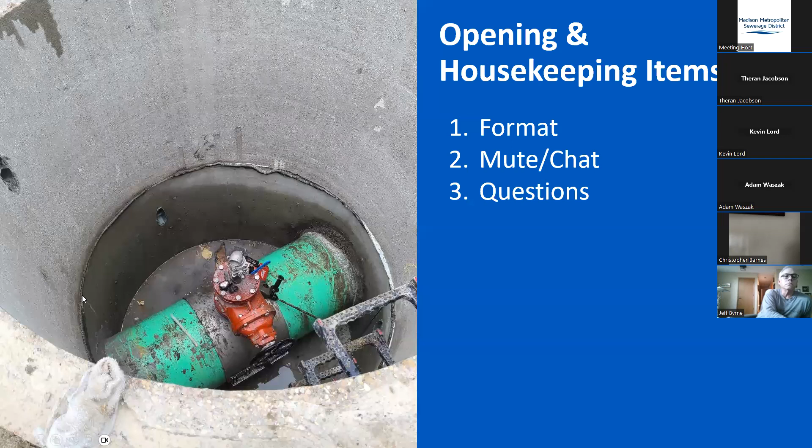The agenda for tonight's meeting: I will go over what the district is, the project background, construction corridor specifics, the selected improvements update that was vetted through PIM number 2 and number 3, and then the trail closures, the construction schedule, and then communication during construction. And then we will take any questions at the end.

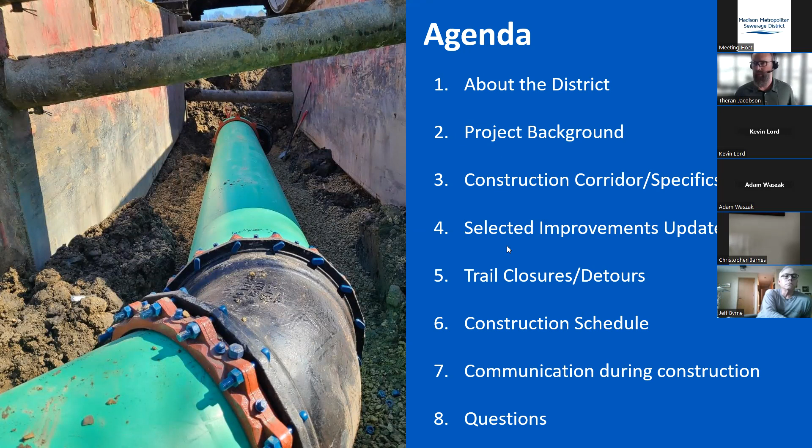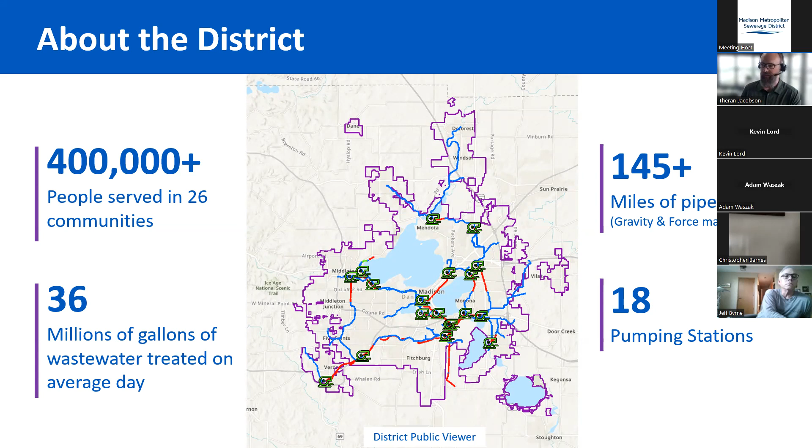The district comprises a regional conveyance system and treatment facility. So basically almost every community within the Dane County area that's adjacent to the city of Madison is connected to the district. So your local collection systems discharge wastewater to the district. We convey it through 145 miles of gravity and force main, and also through 18 pumping stations that end up at the Nine Springs treatment plant that is just west of Lake Waubesa. And currently we're treating about 36 million gallons of wastewater on an average day.

So what is the sewer system that is underground? From your house, whether you're using your sink, toilet, shower, etc., that flows through a lateral into the street by gravity, and a gravity main within the street flows to larger pipes. As you move more and more downstream, the pipes get larger and larger. And then at some point, it goes to a pumping station where it cannot flow by gravity anymore. The pumping station basically lifts it, pressurizes it, and pushes the water uphill from a low point to a higher point where it can go to gravity flow again.

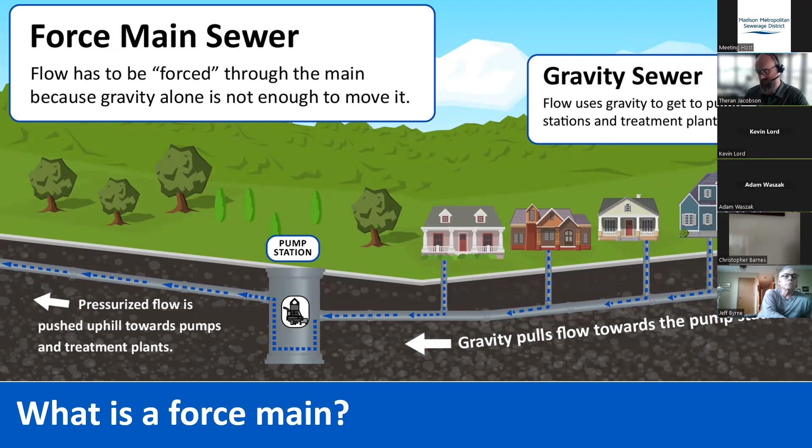If you think about a pumping station and a force main, it's similar to a sump pump in your basement. It pulls water out of a pit, it lifts it through force of the pump out the pipe that discharges to your yard. A similar situation, just untreated water versus clear water.

The Pumping Station 17 planned service area: one of the reasons for the upgrades with the need for the force main is to account for additional flow. That's for multiple reasons. Long-term growth of the area that's within gray on the screen here. You can see the Midtown station at the midpoint here is going to be decommissioned in the near future, and that is going to reroute flow to Pumping Station 17 also. Hence the need for additional capacity, ultimately the need for this additional relief force main pipe. So the city of Verona, portions of the town of Verona, portions of the city of Madison, and portions of the town of Middleton will all convey water to this collection system.

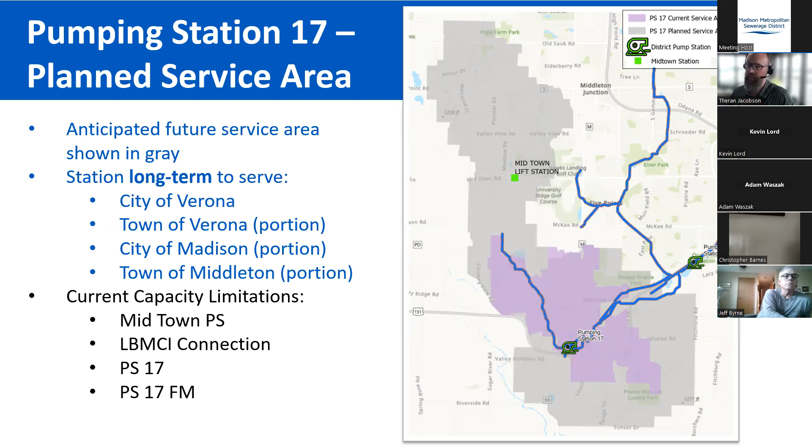The current limitations are the Midtown pumping station and the lower Badger Mill Creek interceptor connection that will go from the end of the blue line right here up to the Midtown station. Those are separate projects. The project we're focused on here is the Pumping Station 17 force main.

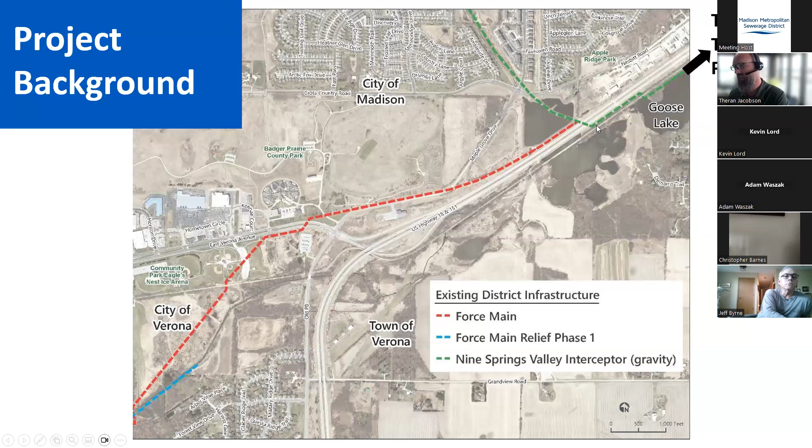The project background for the force main. Phase one was completed in conjunction with the city of Verona back in 2021. That started from the pumping station on Bruce Street and ended at the phase one limits just north of Arbor Vitae Place, south of the ice rink and the Little League complex in the city of Verona. Our objective for phase two is to take it from that point, cross old PB 18151, and connect up by Goose Lake, which is displayed in another figure right here.

The final route for the force main, which was presented at previous public information meetings, starts at Arborvitae and runs along the red route here. That's the force main portion of the pipeline. Then that transitions from force main to gravity at a high point, and gravity flows up to the Nine Springs Valley interceptor that is adjacent to Goose Lake, where we will tie in. That is on the north side of the Military Ridge State Trail.

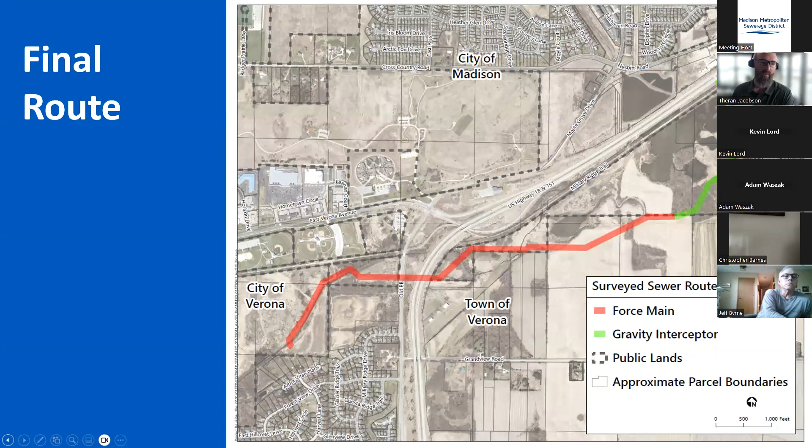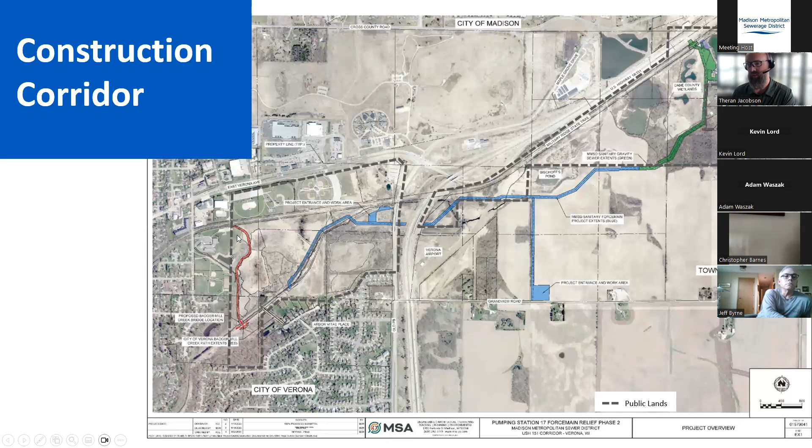The anticipated access points for construction will be through the County Gardens, off of Old PB, and then off of Grandview Road; those are the primary entrances for the district's work. The primary entrance for the city's work is through the ice rink off of East Verona Avenue, crossing the Military Ridge State Trail. There are secondary access points that each phase of the project will have to use, whether it's the city phase or the district phase, depending on what activities are occurring.

So the city's secondary access is off of Arborvitae, and the secondary access for the district's project will be off of Old PB to do some of the trenchless work, which I will get into the details of, along Old PB, and then also off of US Highway 18/151 with limited access. And then there is a secondary access through the town neighborhood up there for very limited access when we're doing work adjacent to that area. So primary access is at the County Gardens off of Grandview for the district, and for the city work it's off of East Verona Avenue.

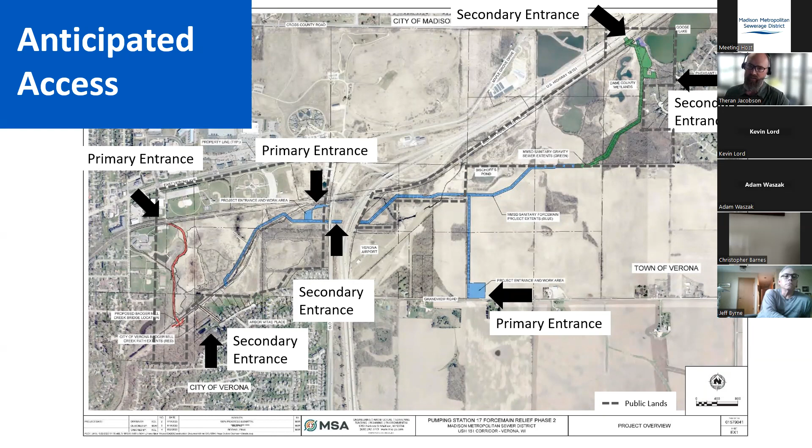The construction keynotes here, I want to highlight some areas along the district route. We have two creek crossings that are west of PB. We have trenchless installation under the roadways of Old PB and US Highway 18/151. That's basically a boring machine that will drill under the road to daylight the pipe from one side to the other, so that way we can keep traffic open and not install that by open trenching. We have additional creek crossings on the east side of 18/151.

There are select trees that are not being removed. There's an oak and some hickories that are being preserved along the south line of the Goose Lake area by the town and the county lands up there. And then we do have some tree clearing in this area up by the town where the gravity section of the district pipe is. And then, of course, the city path and the bridge construction to go from the south side of Badger Mill Creek to the north side.

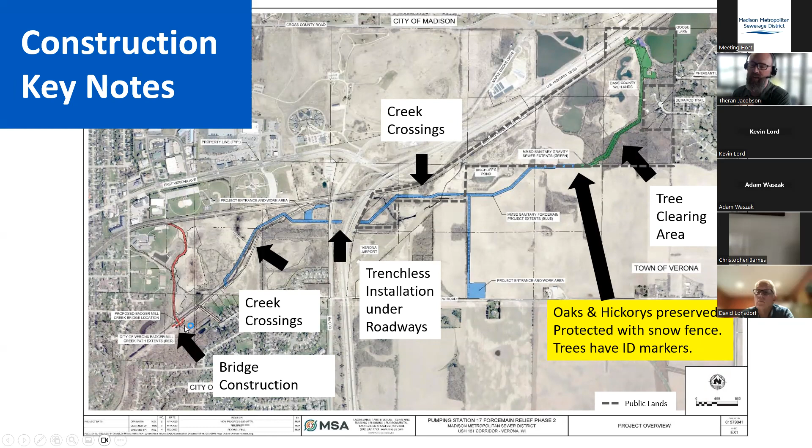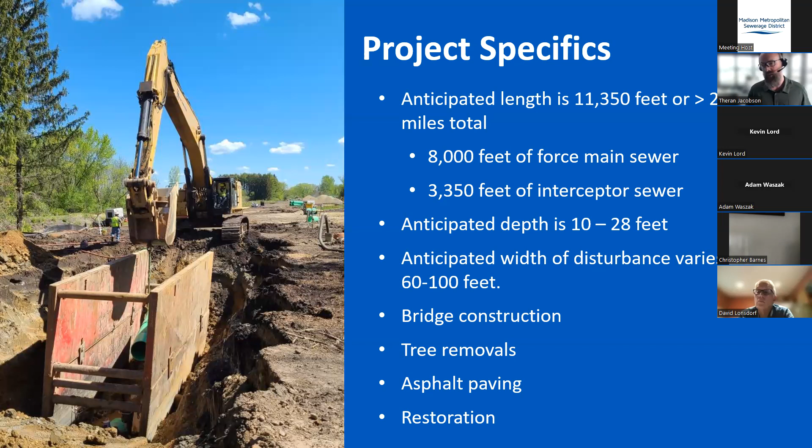For the project specifics, there is anticipated a little over 11,000 feet of pipeline to put in, so a little over 2 miles. 8,000 of that is force main pipe, and a little over 3,300 is the interceptor sewer. We have depths ranging from 10 feet to 28 feet for excavation. That'll translate to a width of anywhere from 60 to 100 feet along the corridor of disturbance. We also have the bridge construction over Badger Mill Creek for the city work, the tree removals, the asphalt paving associated with the city work, and overall vegetative restoration as part of the project.

The select improvements were discussed at the previous PIMs, and I do have a figure to follow to refresh everyone's memory. There are select improvements being done with the project and then after the project. Completed with the project are going to be the Badger Mill Creek path extension and paving of the Arborvitae connection. That's improvement number 1. These are the same numerical references that were previously presented. The oak tree line / hickory tree line restoration and select clearing. The native prairie restoration on areas 9 and 10. And then the Pheasant Lane trail widening.

And then after the project, Dane County is going to restore areas 3 and 6. And within that, the Friends of Badger Mill Creek, and I coordinated with Brian Christian earlier on this, are doing work in area 3 with Dane County. So I wanted to put a plug in for him. If anyone wants to reach out to him and help those efforts, he's more than willing to take some extra hands and feet.

And then after the project is completed by the Ice Age Trail, they're going to realign the Ice Age Trail. And like I said, map to follow. The Friends of the Badger Mill Creek, some of the work that they've completed and plans to complete, this is information I got from Brian Christian.

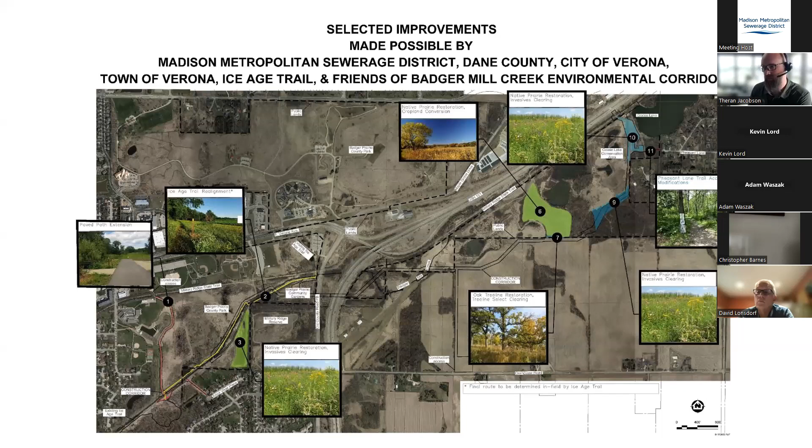The native prairie restoration goals in the areas of 3 and 6 and then 9 and 10 are basically to bring back the historical landscape of the wetland and savanna areas, preserve the fire dependent species of the hardwoods of the oak and the hickory, and then reestablish some of that habitat and that ecosystem value.

And then selected improvement 1. This is the Badger Mill Creek path extension. I just wanted to provide a zoom in of this. So the bridge will basically go just east of where the Lincoln Street channel discharges into the Badger Mill Creek, and then follow the east side of the creek around the new pond and then tie in up by the Little League, just south of the ice rink. And then also provide paving from where the current Ice Age Trail bridge is by the pines there, and then tie into Arbor Vitae Place.

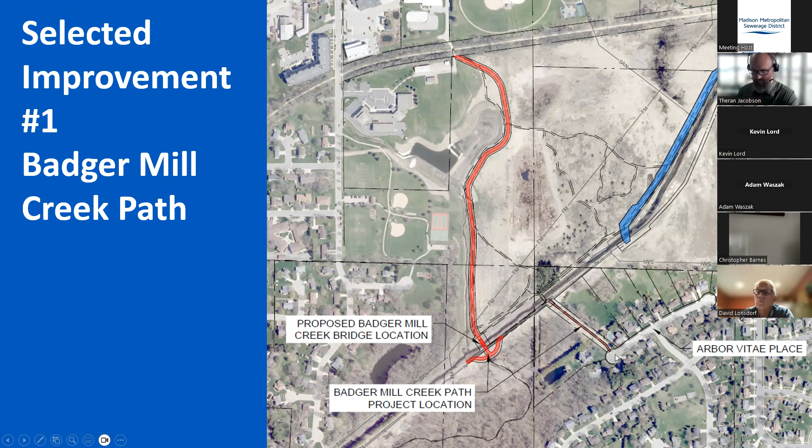And then the Ice Age Trail realignment. So after the project is done, this will be coordinated by the Ice Age Trail, to basically reroute from where the trail does the horseshoe through the county lands where the boardwalk is. It'll cross the new bridge that the city's installing, run along the north side of the creek and go along the berm that's already in existence, cross back to the south side of the creek and run along north of the gardens, and then tie back in to the bridge that is connecting the park and ride to the county gardens just west of Old PB there.

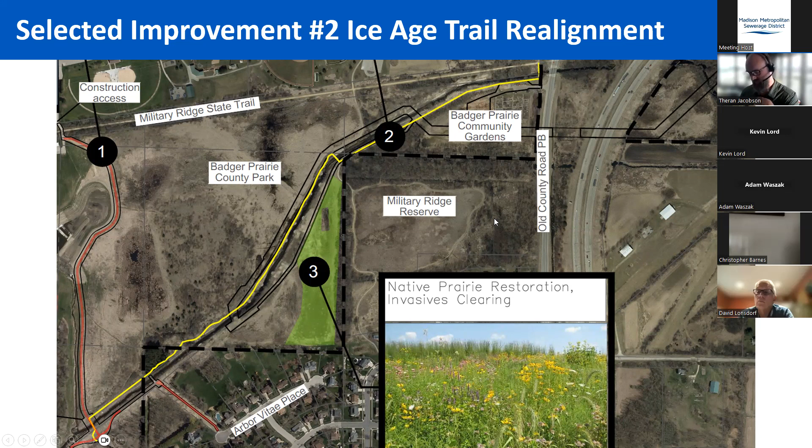And I'm going to hand it off to Kevin Lord now. He was our design consultant for the project. He's going to go over the anticipated trail detours and closures. So Kevin, I'm going to mute and you can take it away.

All right, let me know you can still hear me though, Theran, quick. We are good. I can hear you. Okay, perfect. All right, thanks, Theran.

As Theran mentioned, I'm Kevin Lord with MSA Professional Services, and we were working with the district and the city of Verona on the design part of the project. You can go to the next slide.

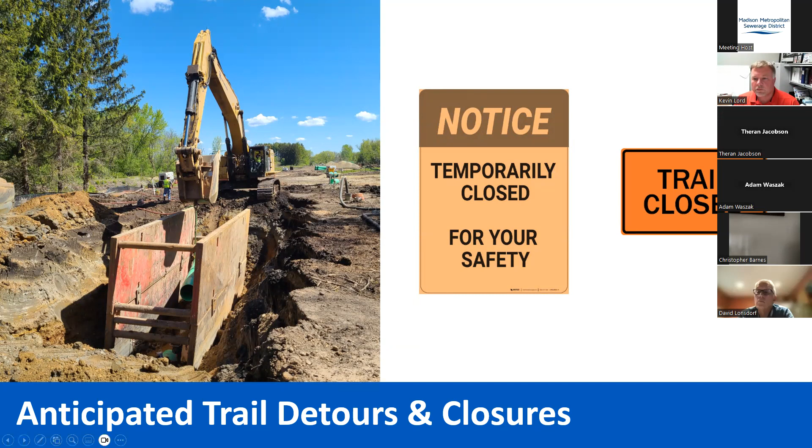Basically, the work is planned to be done in stages. The plan is to install Phase A. They can make the connection to the existing sewer, get through basically where Phase B is, and then obviously do the vice versa and flip the trail back and forth.

With this though, during all these phases, there will be construction equipment crossing the area. So detours are going to be lined with pedestrian barricades for safety. Construction traffic's going to be flagged as needed, and there will be stop signs as well for the construction traffic across the path.

So this work is planned as anticipated within stage 1 of the project. So we'll be starting this fall right away with the project, and be completed by the summer of 2024. And then the Military Ridge State Trail will be reconstructed at the original location once it is all completed. Flip slides.

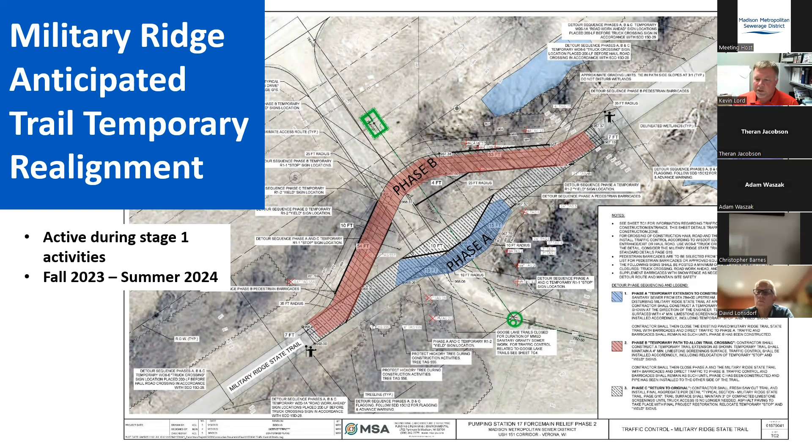The main entrance, as Theron pointed out, for the Badger Mill Creek path will be from East Verona Avenue and through the Verona Ice Arena frontage. The Military Ridge State Trail will remain open as well during construction. However, at this location, it'll just be crossing it with construction traffic. So there'll be stop signs for the construction traffic. We installed warnings and yield signs along the path. Flagging will be utilized as necessary during the specific high volume construction traffic times.

The Ice Age Trail will also be utilizing the Military Ridge State Trail during construction phasing, and as Darren mentioned, there'll be some more diagrams of that coming up here. And then utilizing an area adjacent to the Badger Mill Creek path until construction of the path is complete. This is also planned for stage 1 of the construction, so beginning this fall through the summer of 2024. Next.

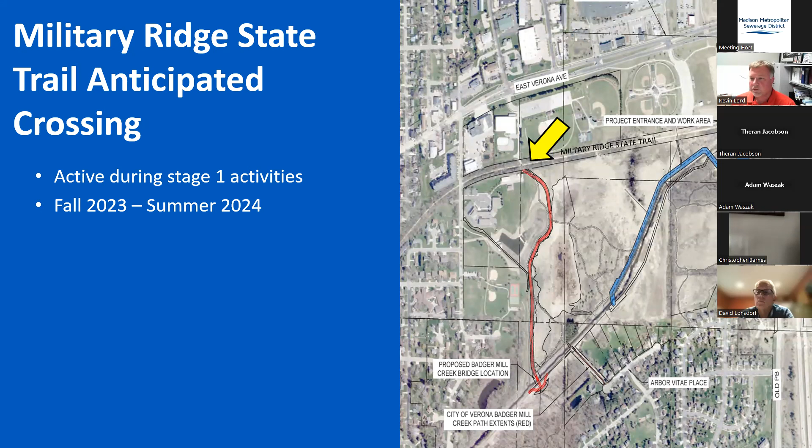All right. This is showing the Badger Mill Creek path anticipated closure in the city of Verona. So this is the portion of the path that was completed during Phase 1. There will be access needs from Arbor Vitae Place in order to complete the bridge and the path on the south side of the Badger Mill Creek.

This work is anticipated as well within the entire stage 1 projects planned for this fall through the summer of 2024. During this time, we're planning to close down Badger Mill Creek. It'll be closed between Lincoln Street Crossing and Arbor Vitae Place. So there'll be path closed signs installed on each end of the closure of the path through that area. Next.

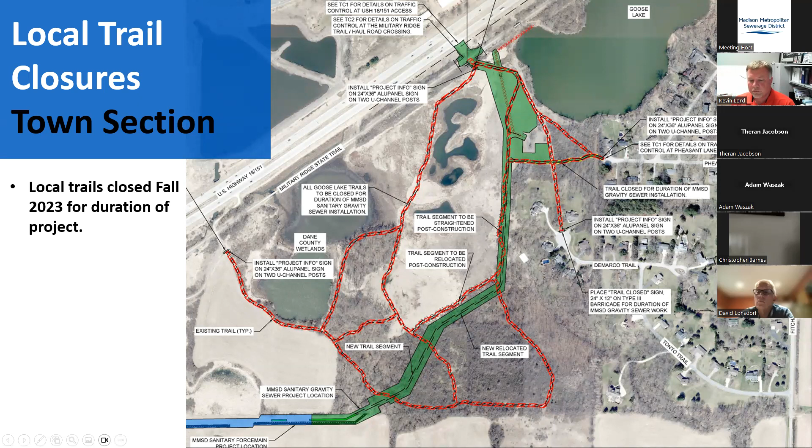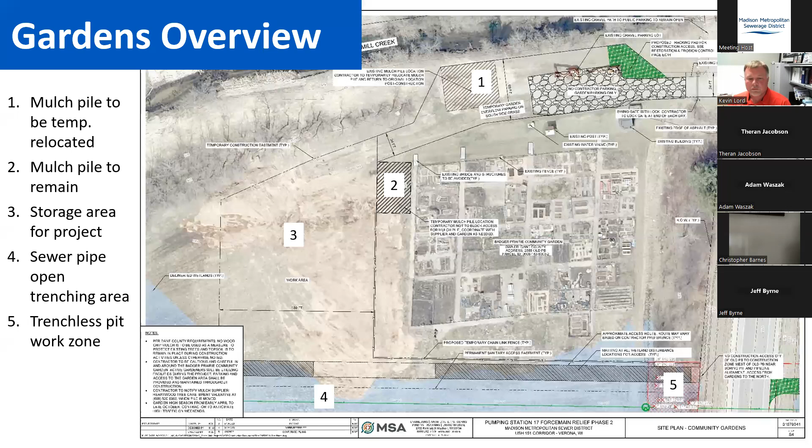The anticipated sequence, which is subject to change, for the build sequence for the district side is basically starting at Goose Lake under stage 1 and progressing into stage 2, with stage 1 and stage 2 being concurrent though, because the trenchless work that is occurring under Old PB and US Highway 18/151 will occur right away also, because that is a long duration of prep work, and then also the installation of the casing pipe that goes under the roadway.

And then prior to everything else, of course, we call it stage 0, which is basically all the prep work that has to get done prior to pipe installation: mobilizing, installing erosion control, clearing, any perimeter site fencing that needs to get put up, all the notification signs. That'll be done before construction even starts. And then also the city's work is in conjunction with stage 1, but they run different schedules. So stage 1 has its own milestone dates to be done for the city work, and stage 1 and 2 for the district side has its own milestone date of when that work needs to be completed by.

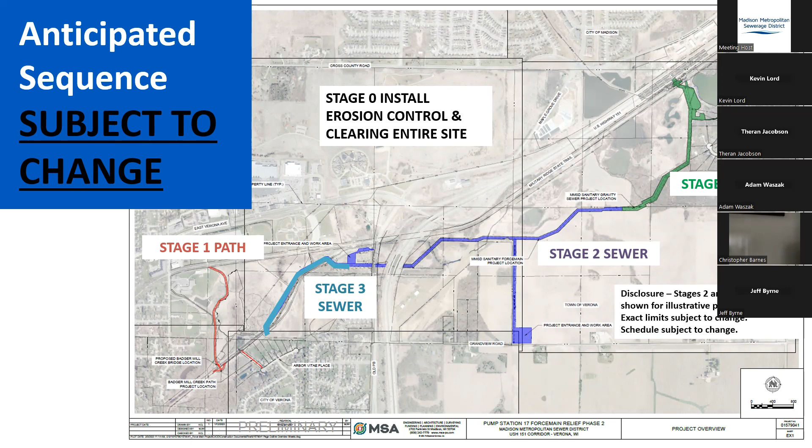The limits on this map are shown just for illustrative purposes only. For stage 2 and 3, the limits of those may change throughout construction, but it gives you an overview of what areas we will be working in at what time. And the next slide kind of goes over the date ranges for stage 1, stage 2, stage 3, etc. So stage 0, everyone's probably wondering when we're going to start construction. First week of November is roughly when we're going to mobilize in, so you can plan on that. Monday, November 6th is when activity will occur with equipment mobilizing in. It may be a few days later, it could be the next week, but plan on November 6th.

Stage 1 completion date. So winter work 2023 through the spring of 2024, with the Badger Mill Creek path being open on or before June 20th, 2024. The target date of that was to be open before Hometown Days. So that's stage 1 for the city portion. That also follows the same milestone date for the district also. So the gravity portion of that work needs to be done in June of 2024 also.

Stage 2 for the district work will continue throughout the winter of 2023 into 2024, and will continue throughout the season of 2024. The exact limits of termination will be determined as construction progresses, but there is a milestone percentage of pipe that needs to be installed within 2024. And then the ultimate completion, stage 3 completion of the work, is to be completed in June, July of 2025. So this is not quite a 2-year build, but anticipating 2 full construction seasons of work occurring out there.

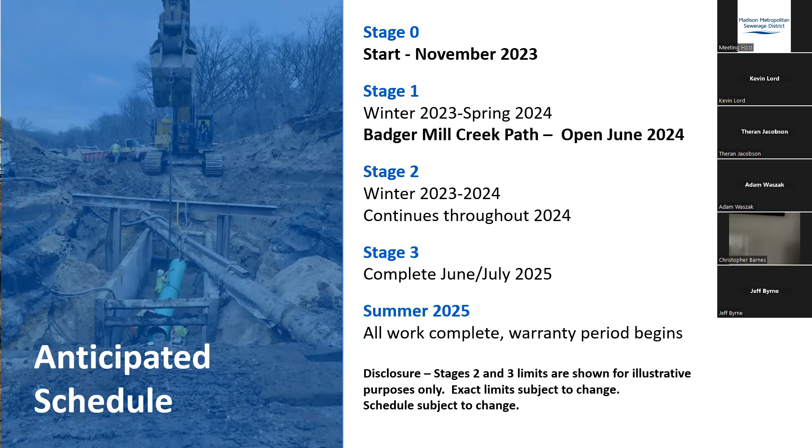The project webpage has been one of the same throughout. I will post random updates roughly when certain milestones are completed, and I'll just give a brief little update. And basically when an update occurs on there, you'd get a notification if you've signed up for when updates are posted to this site. So if you haven't done that, do that. That'll be how we'll communicate through here. Limited communication, but if there is a question somebody has, just feel free to reach out to me.

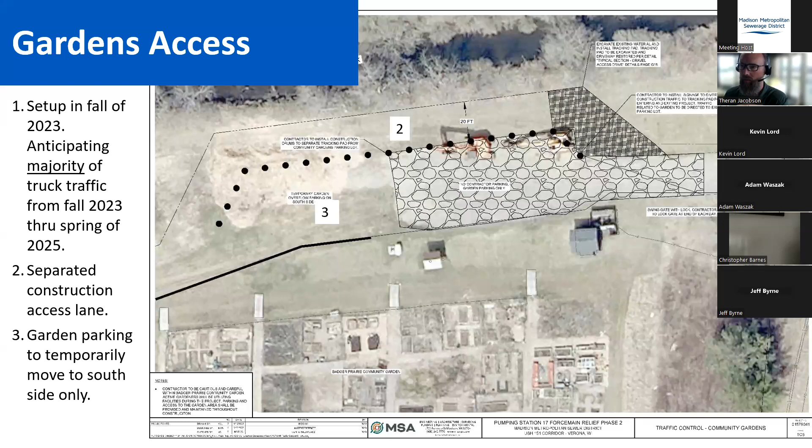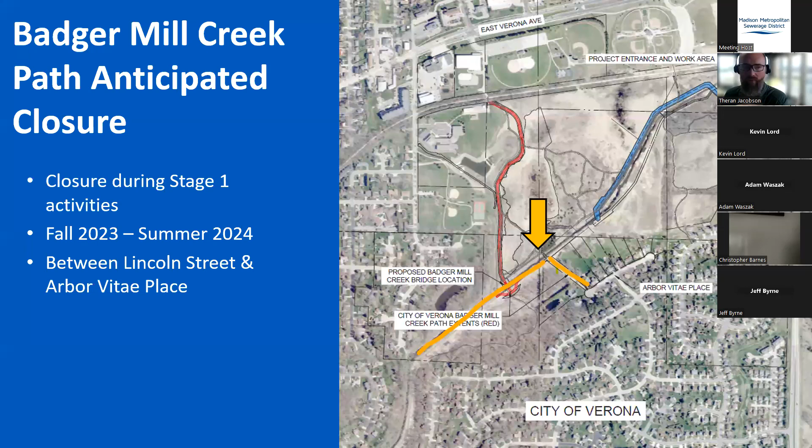And I have another. Okay. Says, for the path on the left side of the map, the red one that hitches up to Military Ridge, will that loop around anywhere during this project? Is he referring to the temporary or the final path? If they could clarify, that would help. The follow-up from that person says, or do we just end up at P&R, the temporary path?

You want to read both statements again, Janelle? Just so I can process it. Sure. It says, for the path on the left side of the map, the red one that hitches up to Military Ridge, will that loop around anywhere during this project? Or do we just end up at P&R, the temporary path?

Yeah, the red path, yes, basically the detour route is to cross for the Ice Age Trail. I'm referring to the Ice Age Trail detour, is to start for the boardwalk ends, run parallel to the Lincoln Street channel, tie into the Military Ridge State Trail, and then end back towards where the junction is up by the Park and Ride. So yes, up by P&R. If there's another route somebody has that's outside of the construction corridor, that's a posted pedestrian route, obviously it's free will.